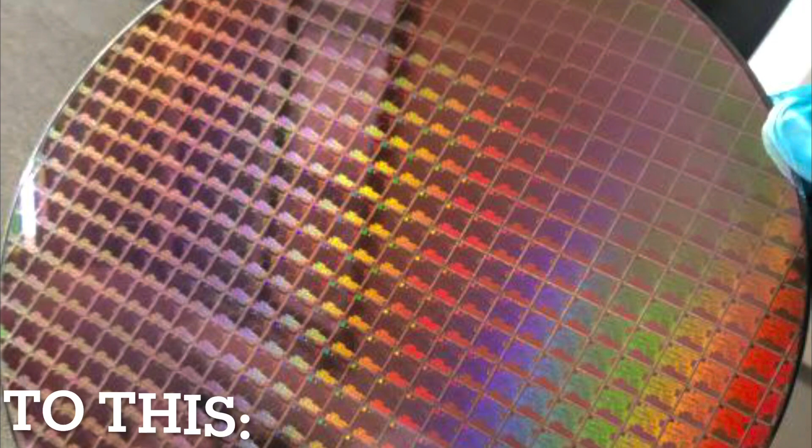In the beginning, computers were people working behind desks with a calculator, pencil, and paper. These people were called computers since they computed or calculated sums, usually for a larger and much more complex problem. At first, the computers were mostly male, since education was restricted to them. Ever since the Renaissance, they were hired and paid by other mathematicians to help crunch data and perform calculations, usually for predicting the positions of the planets. Many mathematicians and astronomers at the time worked this way.

Kepler, an eminent mathematician and astronomer of the 16th to 17th century, was known for often temporarily assisting others as a computer until he came through a breakthrough of his own.

A growth in education and the ever-increasing numbers of the middle class in the 19th century had produced many young women that were trained in maths. Most of these computers were women since they were cheaper. They could be paid less than half the cost of their male counterparts. This meant that it was more economical to hire these women instead of their male counterparts.

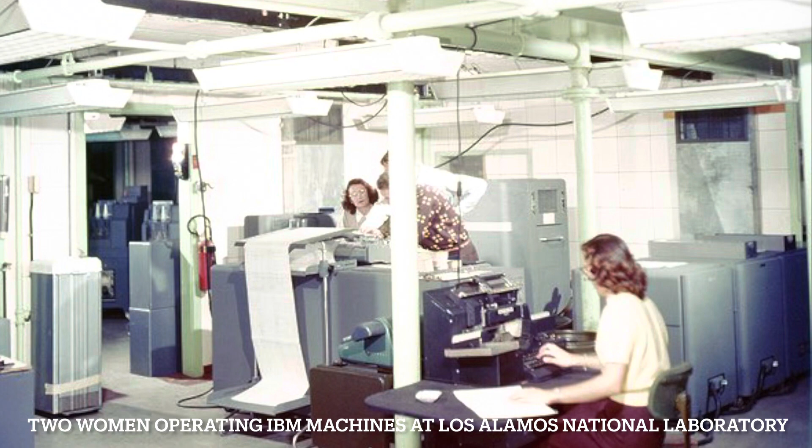At NASA during the space race, female computers were employed in large numbers who confirmed the calculations produced by their higher-ups, even until the introduction of the first machine computers there. In fact, John Glenn, one of the astronauts in the Mercury missions, asked the computer Katherine Johnson to run the numbers again, since he and many others believed that the machine-calculated result was untrustworthy.

It was only when the computer became more advanced and more available did the age of human computers stop. From then on, computers progressed in leaps and bounds. The creation of silicon transistors, integrated circuits, and the invention of processors scaling up to the very large-scale integrated circuits have allowed computers to progress to what they are today.

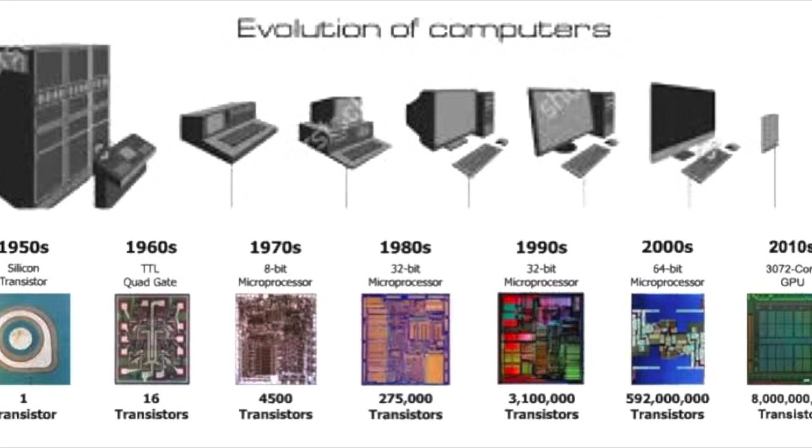Now, one microchip the size of a fingernail has the same computing power as ENIAC, the early computer, which could calculate sums 2,400 times faster than a human. The computer that took the astronauts of Apollo 11 to the moon, though impressive, is hardly any comparison to the modern smartphone, which is 100,000 times more powerful. The most powerful computers of now may be obsolete within a decade, with the fast rate of development that technology has had over the past few decades, and the continuing influence of Moore's law, although the latter theory has been strongly contested.

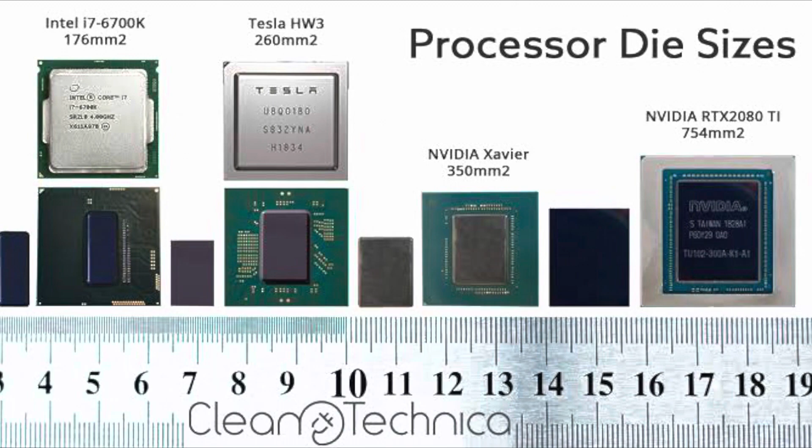Computers function because of the processors inside them, which are small silicon chips we call microprocessors. These computer microchips are made on silicon wafers of an extremely high standard, with a dopant added in to make the wafer either more negatively or positively charged.

The silicon is often sourced from quartz instead of the usual sand that is used to make glass, because it is a more dense form of silicon and has less impurities. The quartz is melted down in the presence of carbon and cooled to make 98% pure silicon.

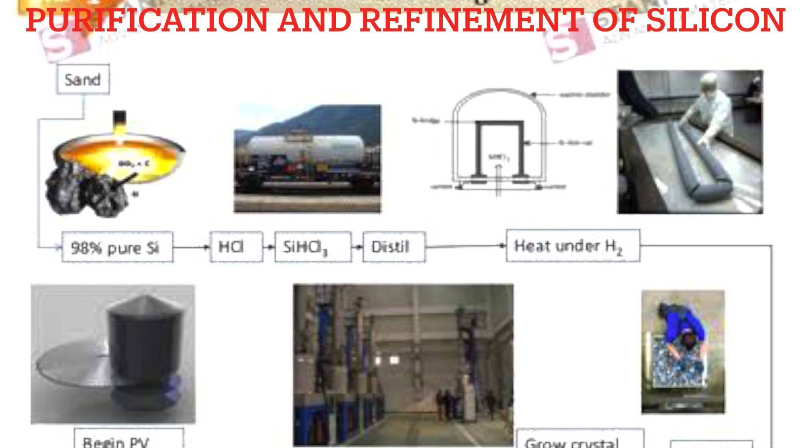Here, two reactions are happening. In most cases, the oxygen in the silicon dioxide would combine with the carbon produced from the burning of the fuel to make carbon dioxide and pure silicon. However, carbon monoxide and silicon carbide are also produced as the process is not perfect, and are left over as byproducts.

This is then either thrown away or in some cases purified again in the next batch, where the process will repeat. The aim of this purification is to make sure that the silicon is as pure as possible for use in manufacturing the silicon wafers, as impurities may interfere with the function of the chip and react with the dopant.

The silicon is then further purified into polycrystalline silicon via a process known as the Siemens process, developed by the German company Siemens. The 98% pure silicon produced in the last step would first be heated to 325 degrees Celsius in the presence of hydrochloric acid.

This leaves hydrogen gas being produced, as well as trichlorosilane, while the impurities react, leading to the production of iron(III) chloride, aluminium chloride, and silicon tetrachloride.

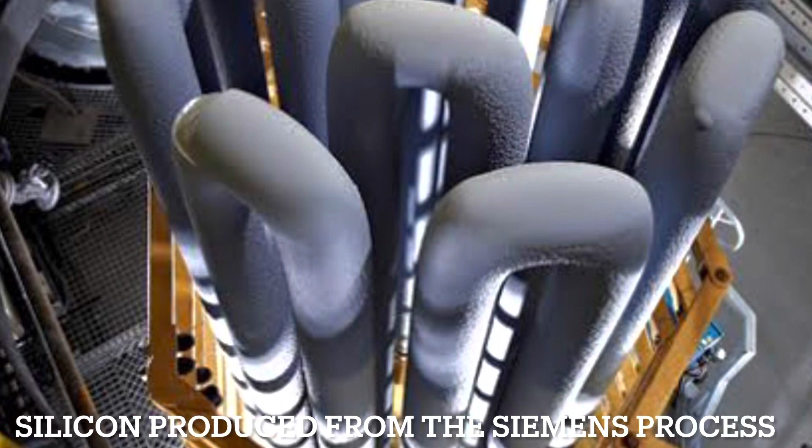The silicon is melted again with outside sources of contamination removed until it is liquid. Usually this is done in an argon atmosphere, in the absence of any oxygen, via induction heating in a crucible. Once the silicon is molten, the dopants will be added into the silicon, with the crucible rotated to ensure an even distribution of dopants suspended throughout the crystal structure.

Usually, boron is added into the silicon to make it more positively charged, while arsenic would be added to make it more negatively charged. Aside from boron and arsenic, phosphorus, gallium, and antimony are also used as dopants.

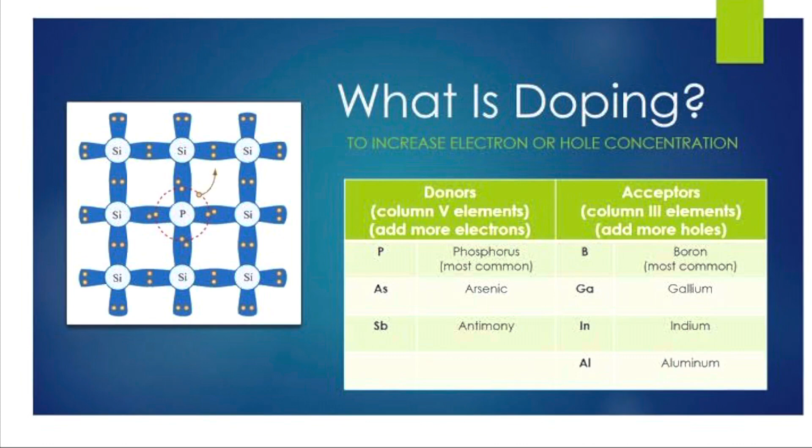While the silicon is cooling down, the dopants would start to move around in the crystal lattice of the silicon, occupying empty spots in the lattice, settling in between the spaces in the lattice, and exchanging places with the silicon atoms in some cases.

These dopants create little recessions in the crystal structure of the silicon, where they occupy a space instead of the usual silicon atom. However, most times there will be an imbalance in terms of charge, either that they have too many electrons and some are left flying around, or they don't have enough and are left with a gap in one of the electron shells. This means that the chip would either have a slightly positive or slightly negative charge.

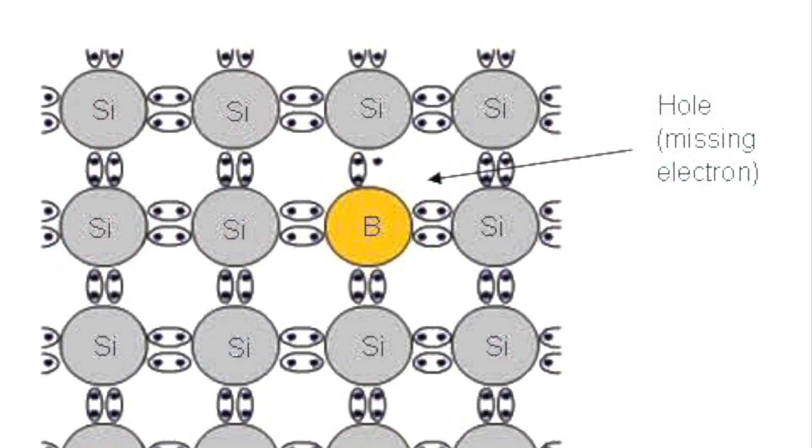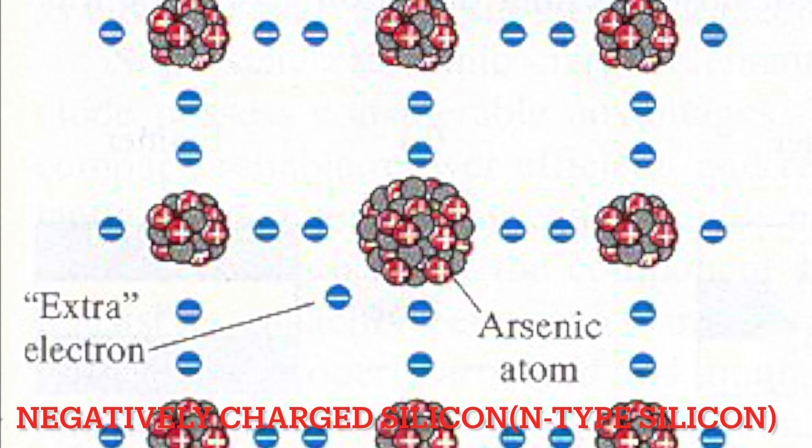Another process, known as the Czochralski method, is performed. It was accidentally discovered by the Polish scientist Jan Czochralski, who accidentally dipped his pen in molten tin and got a small tin crystal from it that resembled a melting cylinder.

This is when an ingot of similarly pure silicon is used as a nucleation seed for the crystallization of the silicon in the tub, changing it from a polycrystalline form into a monocrystalline mass.

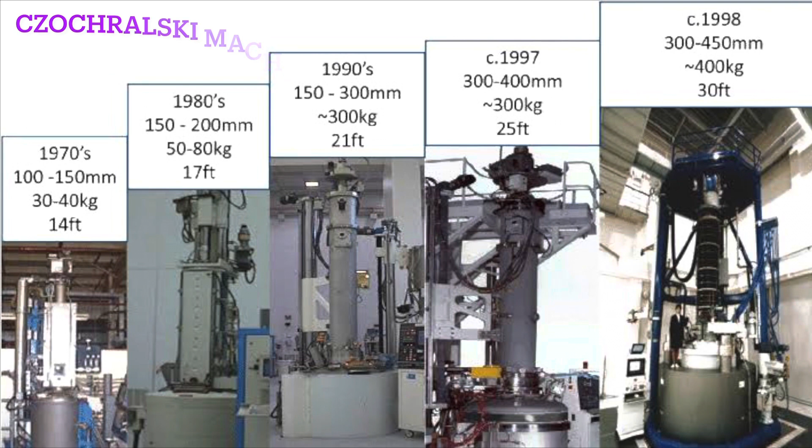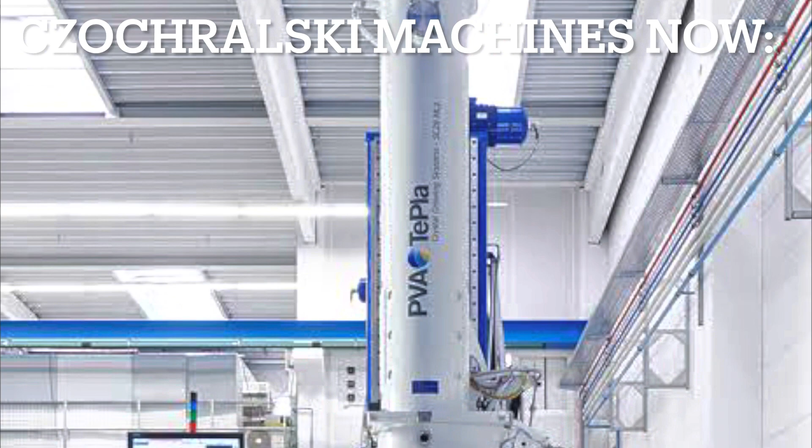The silicon's temperature will be lowered to just below the melting point of the metal and slowly pulled out of the molten vat while it spins, until it grows into an ingot.

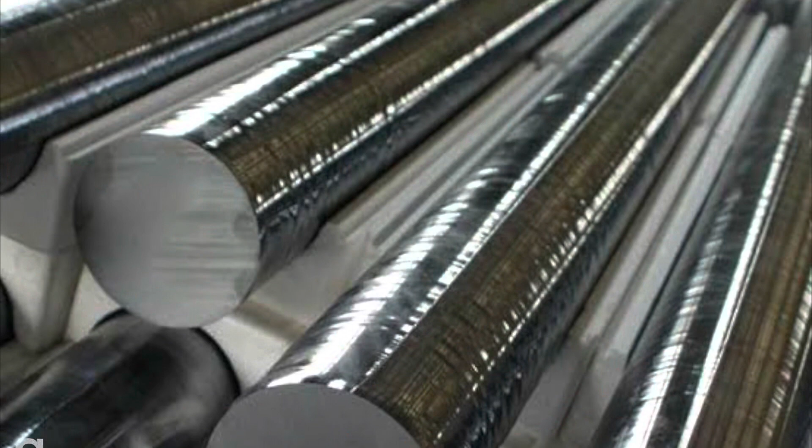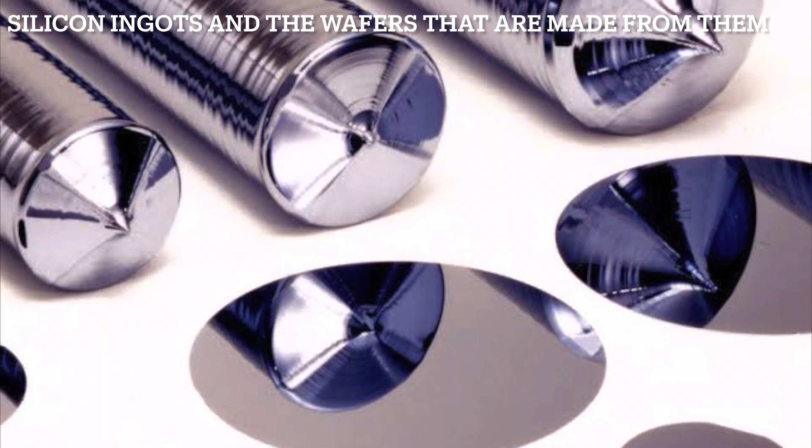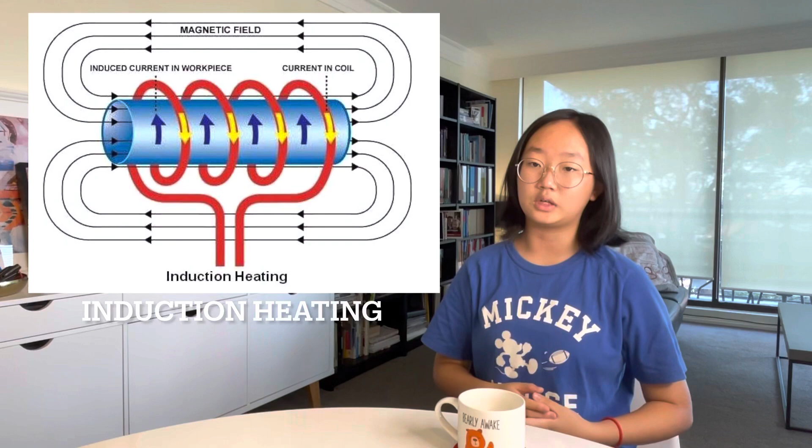Ultimately, the silicon would be heated locally via an induction coil which would run up and down the length of the crucible. A seed crystal would be placed at the start, where the heated coil would melt the silicon, which would solidify with the same crystal structure as the source crystal.

This is called rapid magnetic induction heating, and much research is being carried out on it. The induction coil would use radio frequencies and microwaves to heat the silicon almost instantly, which meant that there would be less time dedicated to the production of the silicon ingot, the basis for the wafers.

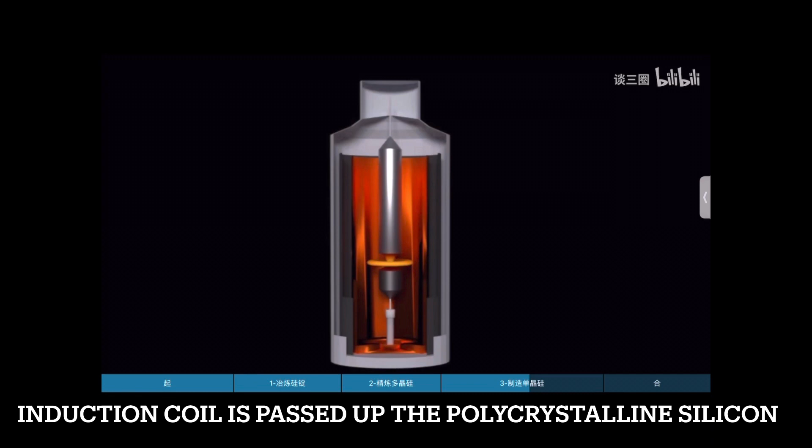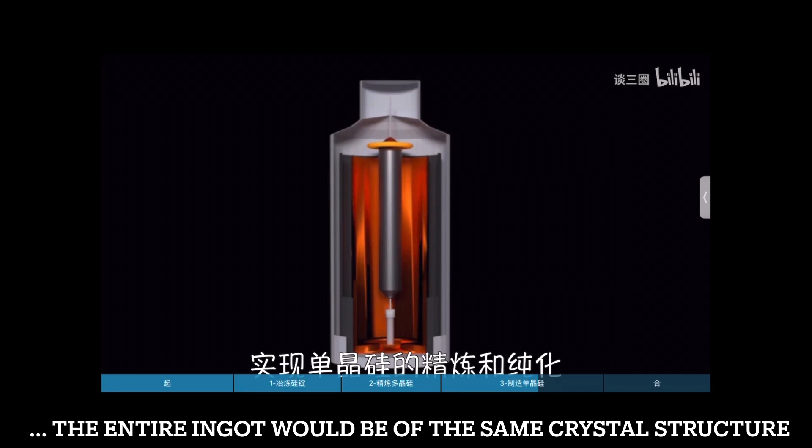The size and diameter of the ingot is determined by the pulling speed. The quicker this is, the slimmer the silicon ingot will be. This process is also used to make other monocrystalline metals such as platinum and gold, and synthetic gemstones.

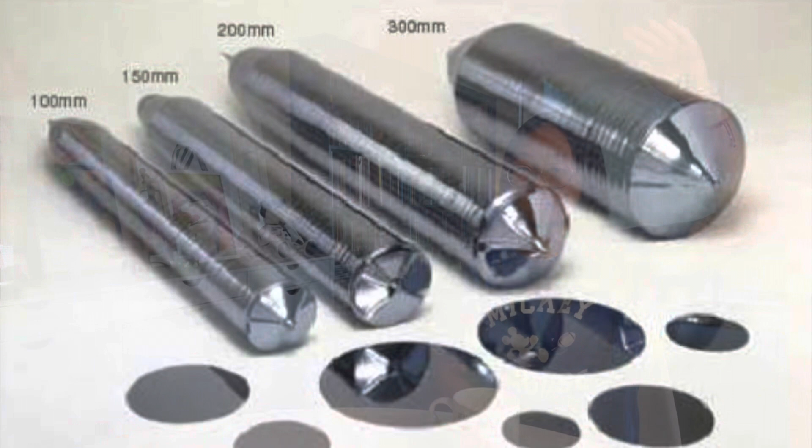Now that the base material for the silicon wafer has been made and refined, the process starts on making the wafer itself.

Usually, the ingot of silicon obtained from the Czochralski process is a little larger than the wafer diameter, since the silicon crystal cylinder produced would not be perfect for a number of reasons. Due to the rotation of the crucible while the Czochralski method is performed, the surface of the ingot would also be slightly distorted with bumps on the surface.

This means that the cylinder would need to be polished to the desired diameter with a small margin of error, to ensure that all of the wafers would be of equal diameter. Both distorted ends of the silicon ingot would be chopped off and usually thrown away, though if the silicon is pure enough, it will be melted and recast. After this step, the cylindrical ingot would have a mirror shine to it.

The polishing process produces a lot of heat. The silicon is usually cooled with water while being ground. Then, the silicon wafer has a small identifying edge or indent cut into it as a positioning indicator for identifying its purpose, as well as giving the robot a calibration position to set the start and ending point.

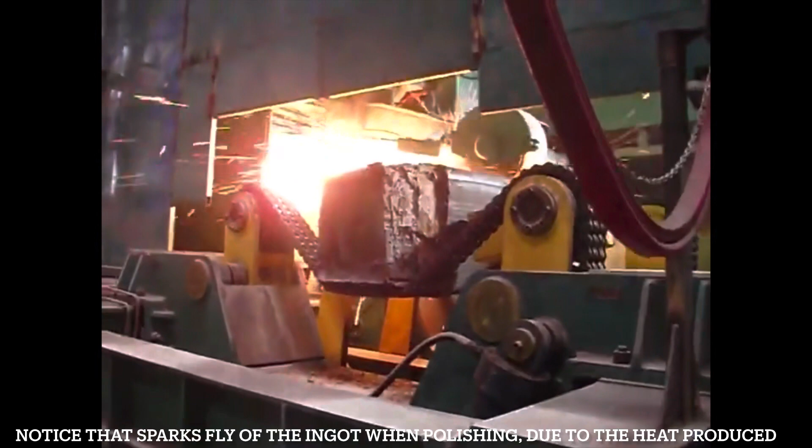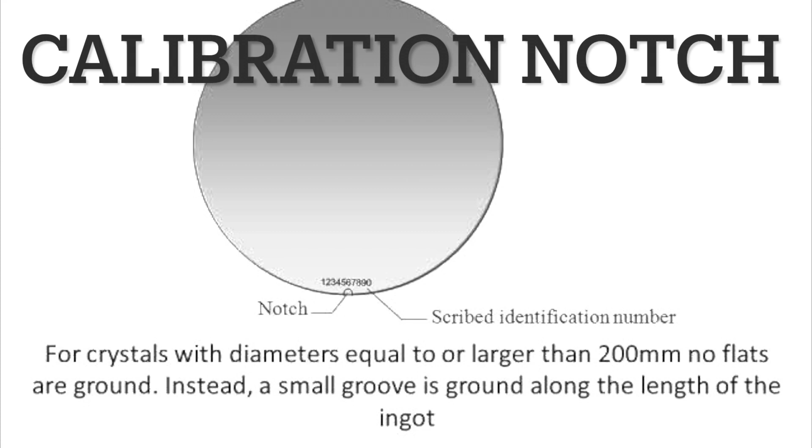Wafers with diameters of 200 millimeters and above would usually have an identifying notch carved into the wafer, while wafers with diameters under that will have a flat carved into them. Since the silicon wafer can be in many different orientations, this information would need to be included to avoid confusion. The different crystal orientations would also lead to the wafer shattering in different ways, which can be a useful test for people who have many wafers on hand.

After the silicon ingot is cut and polished, it is cut again into the desired shape of the wafers. This cannot be done the traditional way with one saw cutting the silicon like one cuts a steak, because this process is inefficient and slow.

Instead, the silicon is cut all at once, like multiple wire saws all working at once to cut a block of wood into small pieces. The strands of the saw are covered with diamond dust, giving it extra abrasive and cutting power to make sure that the wafer can be cut faster.

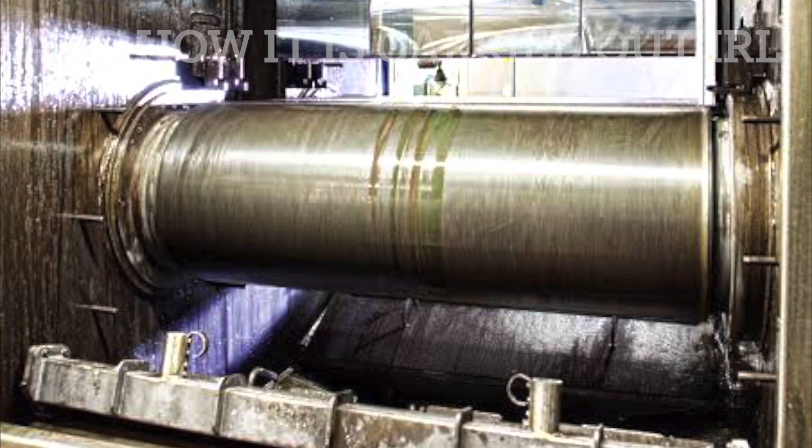Then, the silicon wafers are rounded off. This is not only because the silicon of this quality is prone to shattering and chipping, but because it would ensure the even coating of the photoresist, which would be used later in the manufacturing process.

If the wafer had right angle sides, which is the case before polishing, there would be a relative abundance of ink towards the edges called the edge crown. This would mean that the details that were to be printed towards the edge of the wafer would not be properly developed, as it would require an excess of UV light to develop there.

After this, the silicon wafer is usually branded with a number that provides crucial information about the wafer, such as the vendor, the batch number, the identification number, and its crystal orientation.

This is also the same process in the manufacture of solar panels, particularly the solar cells in them that allow the panels to work. However, the purity difference between the silicon used for solar panels compared to the purity required for silicon wafers is large. The silicon solar cells only require 6 nines, a purity of 99.9999%.

Whereas the purity required for the silicon wafers used in the silicon microchip manufacturing process needs 10 to 11 nines of purity, which is 99.99999999 to 99.999999999% purity, a large difference.

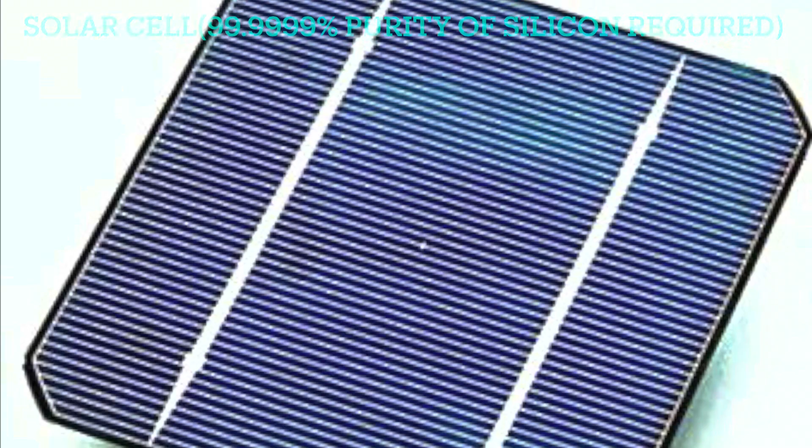The difficulty in producing and purifying silicon to this standard is what makes the production of silicon wafers largely concentrated in a few companies and suppliers around the world. Currently, the largest producer of these silicon wafers is China, due to a growing demand for renewable energy there.

The silicon wafer is then roughened on one side while polished on the other. This is part of a process called backside roughening, where a certain side of the silicon wafer is roughened. This is done in order to make the wafer thinner, as well as to ensure that impurities would mostly be located on the rougher side of the silicon wafer, as well as helping identify the side on which photoresist would be applied and photolithography performed.

Later, a layer of silicon dioxide would be applied to the silicon wafer. This is also one of the reasons why silicon is used so widely as a semiconductor. For every 1,000 free bonds the silicon has, the silicon dioxide can bond with 999 of them. This is an important ability that the semiconductor material should possess, and is one of the conditions researchers consider before pushing it for further research.

The wafer is then pushed on to the next step, which is to cleanse it in 3 different baths: the initial cleaning bath and then an acid bath, which would wear down the surface of the wafer, smoothing it. There, a special reaction occurs between the nitric acid and the hydrofluoric acid in the bath, eating away at the silicon and cleaning any impurities or organic matter that may have been on the surface of the chip, such as dead skin cells, bacteria, or viruses.

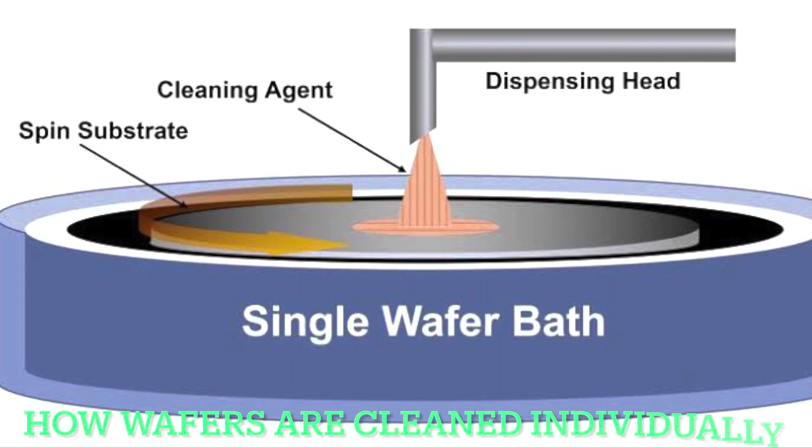Bacteria at their smallest are 200 nanometers wide, which is why workers who work at the factories often wear full body suits, masks, and gloves when handling the chip. If a worker wants to smoke, they cannot enter the factory until 30 minutes after they smoke, since particles in their breath would affect the cleanliness of the factory and the environment in which the wafers are processed. This also means that any imperfection on the surface of the wafer itself must also be smooth and perfect to that degree.

To achieve this, the chip then needs to undergo a process known as CMP, or chemical mechanical polishing. This process uses a corrosive chemical slurry as well as an abrasive to make the surface of the silicon wafers smoother. Usually, the silicon wafers will be loaded onto a carrier which has measures put in place to make sure the wafers would not slip from the carrier. This is achieved by using vacuum suction instead of adhesives, which would leave a residue on the surface.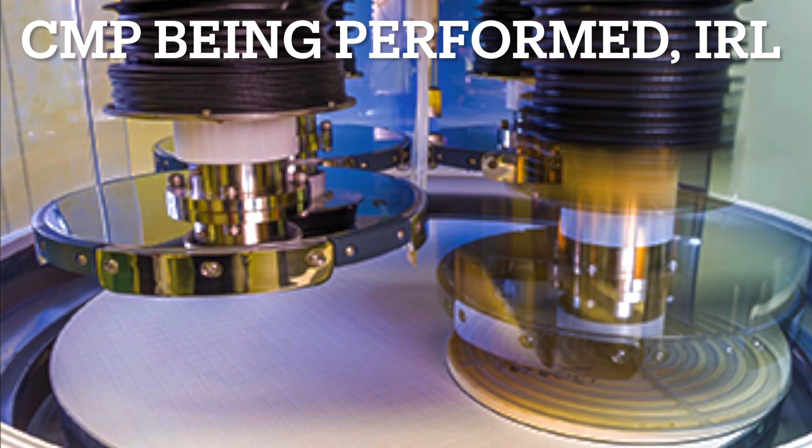The carrier would then slowly be lowered onto the rotating surface of the platen where the slurry and the abrasive would start doing the work, smoothing out the surface of the silicon wafer until it is almost perfectly smooth. Depending on the diameter of the chip, the wafer would be polished either on one side or both, as is the case with the largest silicon wafer size as of now, 12 inches, which is polished on both sides before progressing on to the next step in the manufacturing process.

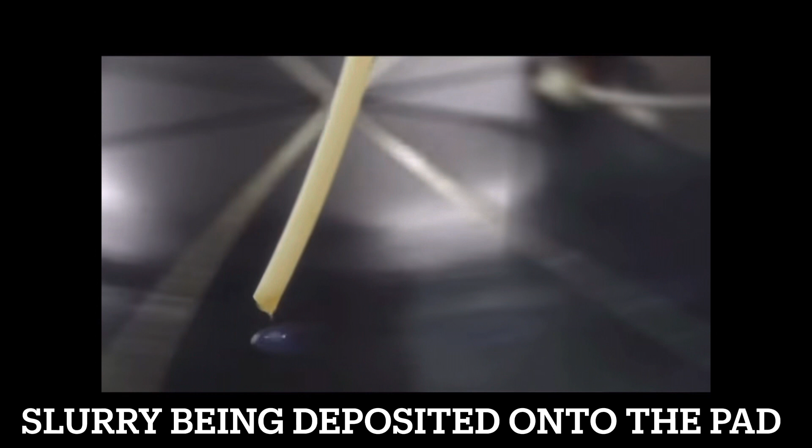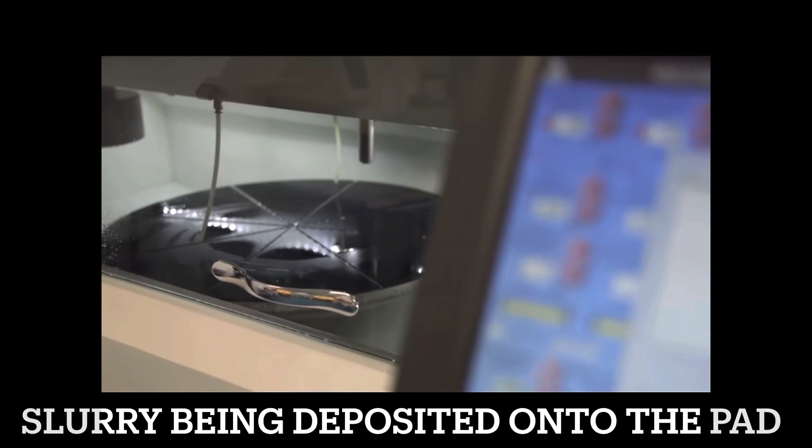Before the 1990s, CMP was viewed as being too dirty. The abrasives used in the process themselves would contain impurities and create particles from the surface of the wafer, which could further attack the wafer and damage the surface. The chemical slurry, made out of various corrosive chemicals, can also cause stress cracking and is a major cause of corrosive attacks, which weakens the wafer.

These problems could all be solved with the optimization of new technologies which would mitigate these problems. The oxide polishing process, which is used as an alternative to CMP, was the only process in use before the 1990s.

No matter the method used in getting the surface of the wafer as smooth as possible, the wafer is now ready to be washed as it approaches the end of being a silicon wafer and becoming a silicon microchip. The wafers are cleaned and dried in order to make sure that there are no contaminants on the surface of the wafer. The manufacturers cannot risk the chance of contaminants larger than 51 nanometers on the surface. Any organic residue that was left on the surface would also be cleaned off.